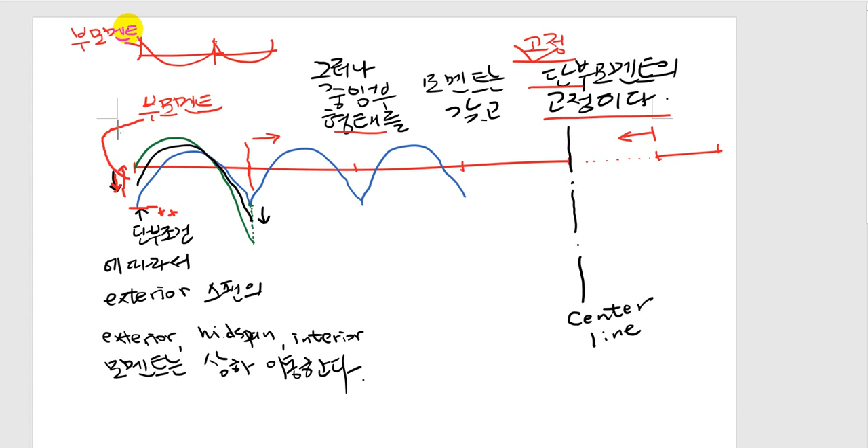근데 또 많은 책들을 보면은 이렇게 그리죠. 이렇게 그리고 여기를 부모멘트 이렇게 읽어요. 뭐 정신만 바짝 차리면 괜찮은데요, 나중에 이제 밴딩 모멘트 다이어그램이 복잡해지면 막 부정 이게 헷갈립니다. 그래서 저는 아예 처음부터 이렇게 방향을 딱 잡아서 그리는 거죠.

그래서 이제 요 사이를 왔다 갔다 하는데 이게 핀이 돼가지고 단순보가 돼가지고 모멘트가 0이 될 때는요, 얘가 올라가서 이렇게 많이 축 좀 빠지는 이런 형태를 갖게 되겠습니다. 그리고 중간쯤 어디면은 이렇게 되겠죠. 그래서 이 단부 조건에 따라서

여기 M0에 대한 퍼센테지가 바뀌겠죠. 여기가 얼마라 그랬죠? 그러니까 여기가 0.65 M0였죠. 여기도 0.65. 다 0.65죠. 여기는 0.35였죠. 기억나시죠? 그리고 이제 이것도 변하겠죠. 그리고 이 안에는 안 변한다는 얘기죠.

그래서 여기를 보시면요, 이제 단부 조건이 완전 고정도 아니고 완전 단순도 아닌 어중간한 고정단을 가졌을 때는요, 0.65에서 이제 위쪽으로 이동을 한다 그랬죠. 그래서 여기 있던 0.65에서 위쪽으로 이동을 하면서 이게 좀 내려가죠. 그래서 여기 조금 격차가 있는 겁니다.

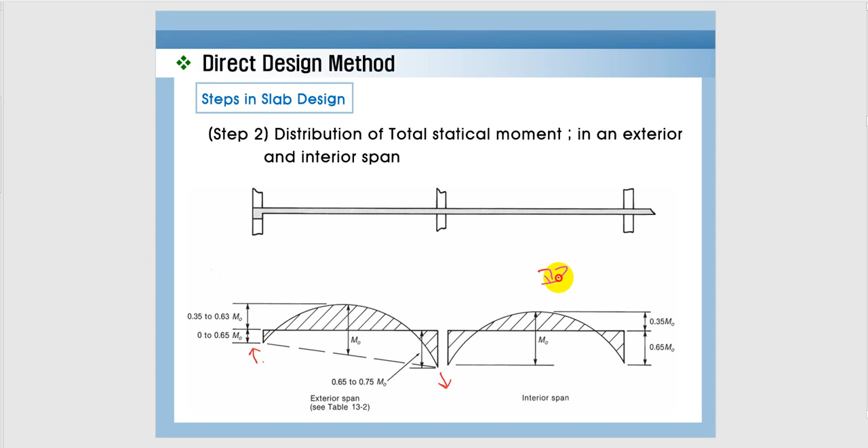그리고 이제 이 내부 쪽은 무조건 다 고정단이다 그랬어요. 이 내부 스팬은요. 여기는 이제 우리가 엑스테리어 스팬이라고 부르고요. 여기는 이제 인테리어 스팬 이렇게 부릅니다. 저희는 항상 이거로 나옵니다.

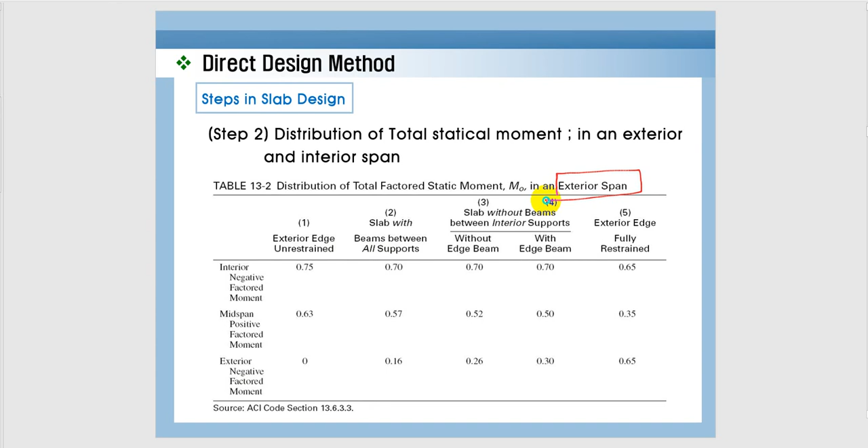자, 그래서 이제 우리가 도표를 보면요. 이제 도표가 좀 이해가 가시죠? 요 도표는 지난 시간에 공부한 거죠. 엑스테리어 스팬에 대해서만 그린 겁니다. 그러면 인테리어 스팬은 왜 안 그려줍니까? 인테리어 스팬은 그릴 필요가 없죠. 왜냐하면은 무조건 0.35하고 0.65니까. 설명드린 대로 엑스테리어 스팬만 그린 거다.

그런 거예요. 그래서 완전 고정일 때는요, fully restrained일 때는 우리가 배운 대로 0.65, 0.35. 이 얘기는 뭐냐면은 아까 보신 대로 완전 고정일 때는 0.65, 0.35, 0.65, 0.35 이 패턴이 반복이 되는 거죠.

그런데 얘가 조금 이제 단순보 쪽으로 흘러가면요. 여기는 작아지고, 여기는 커지고, 여기도 좀 커지고, 그렇게 되겠죠? 그래서 보면요, 완전 이제 단순보로 풀릴 때요.

The exterior edge unrestrained 됐을 때는 여기 0이 되겠죠. 무조건 0이죠. 그 다음에 여기가 이제 0.63으로 올라갔죠. 0.75. 이렇게 되는 거죠. 여기가 0으로 됐죠.

여기 0.65에서 0이 되어버렸죠. 단순보니까 모멘트가 이제 안 걸리니까요. 그다음 0.35짜리가 올라가서 0.63이 됐죠. 올라가겠죠. 이렇게. 그러면 쭉 빠져가지고 여기가 이제 0.75가 되는 겁니다. 이렇게 모멘트 다이어그램이 이렇게 되어 있는 상태에서 이렇게 변하는 거죠.

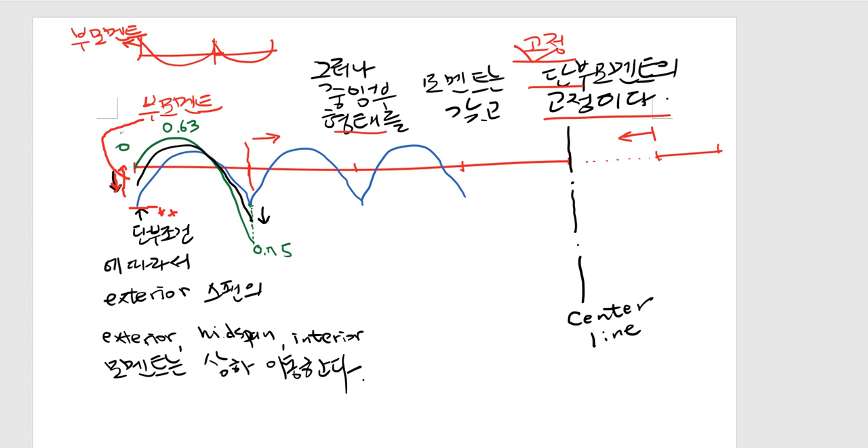자, 그래서 이렇게 이제 각각의 조건들이 이제 3개가 더 붙었어요. 이게 양극단이 되겠죠? 완전 고정, 그 다음에 exterior edge unrestrained, exterior edge fully restrained.

자, 두 번째 경우에는 이제 이 경우죠. Slab with beams between all supports. 그러니까 모든 서포트에는 빔이 있는 그런 슬라브예요. 이런 슬라브가 되겠죠. 모든 슬라브에는 빔이 있는 그런 슬라브가 되는 거죠.

두 번째 경우죠. 그리고 이제 세 번째, 네 번째 경우는 이제 slab without beams between interior supports. 얘는 이제 서포트에는 전체적으로 빔은 없어요. 없지만은 맨 끝단에는 이제 빔이 있을 수 있고 없을 수 있다. 우리가 맨 끝단에 있는 빔을 엣지 빔 이렇게 얘기를 하죠. 그래서 세 번째, 네 번째는 여기죠. 어쨌든 간에 이 서포트에 빔이 하나도 없어요. 그런데 끝단에만 있을 수 있고 없을 수 있고, 엣지 빔. 그래서 이렇게 우리가 5가지가 있죠.

완전히 단순 뭐 빔. 그다음에 여기 하나가 이제 완전 고정이 하나가 있죠. 5번째. 그래서 우리가 양단 고정도의 강한 정도로 볼 때는 이제 완전 고정이 제일 강할 것이고요. 그 다음에 이제 요게 강할 것 같고, 그 다음에 요거, 그 다음에 이제 이거랑 비슷하고, 이렇게 되죠.

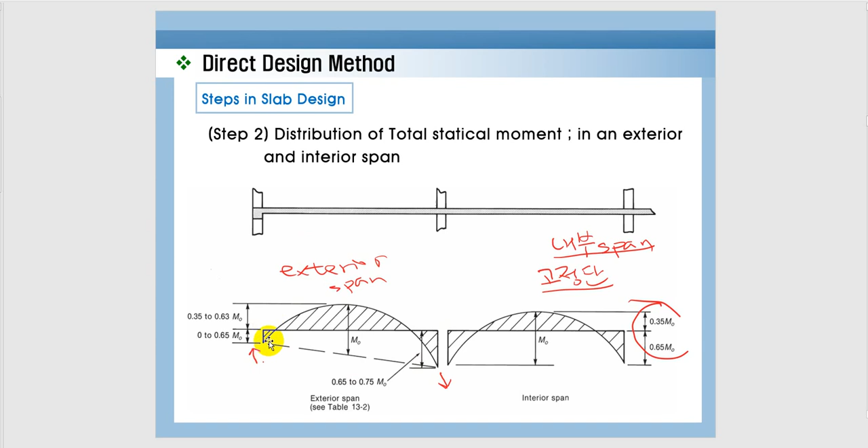이게 익스테리어 스팬을 얘기하는 거예요. 인테리어라는 게 혼동하시면 안 됩니다. 여기 엑스테리어 스팬에서 인테리어 여기를 얘기하는 거예요. 여기가 아니고 엑스테리어 스팬에서 인테리어 여기 얘기하는 거예요. 그래서 엑스테리어 미드 인테리어. 몇 번 말씀드렸어요. 이 표는 단순히 엑스테리어 스팬에 관련된 표고, 인테리어 스팬에 대해서는 표가 없습니다. 왜? 전부 다 이거기 때문에 이런 말씀을 드렸습니다.

그래서 이 경우가 완전 고정될 때가 여기 있었고요, 미드 인테리어, 그다음에 여기 있는 경우가 여기고, 여기 있는 경우가 여기 이렇게 해서 우리가 이 표를 보면 잘 이해가 안 가죠. 이 표를 좀 자세하게 해설을 하면 이렇게 되는 겁니다.

이해가시죠? 그랬을 때 우리가 구조 해석을 거치지 않고 모멘트 다이어그램을 이렇게 그릴 수 있습니다. 여기 보면 인테리어는 무조건 다 고정단 모멘트를 따릅니다. 엑스테리어에만 단부 조건에 따라서 상하를 오르락 내리락 합니다. 오르락 내리락 할 때의 요 계수, exterior, mid, exterior, interior. 지금 많이 반복하고 이제 나중에 문제 풀 때는 반복을 하지 않습니다.

계속 같은 얘기를 반복할 수 없잖아요. 여기 보시면 이런 계수를 가지고 오르락 내리락 하는데, 이쪽으로 갈수록 고정단의 고정도가 강해진다 이렇게 보시면 맞습니다. 굉장히 잘 만들어진 표죠.

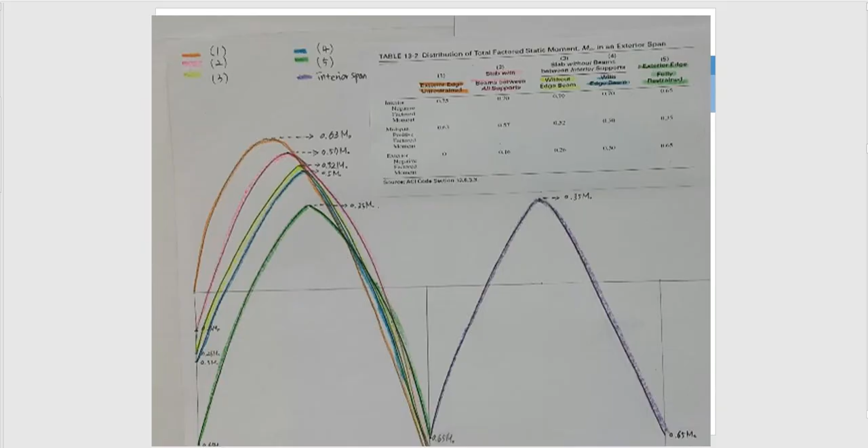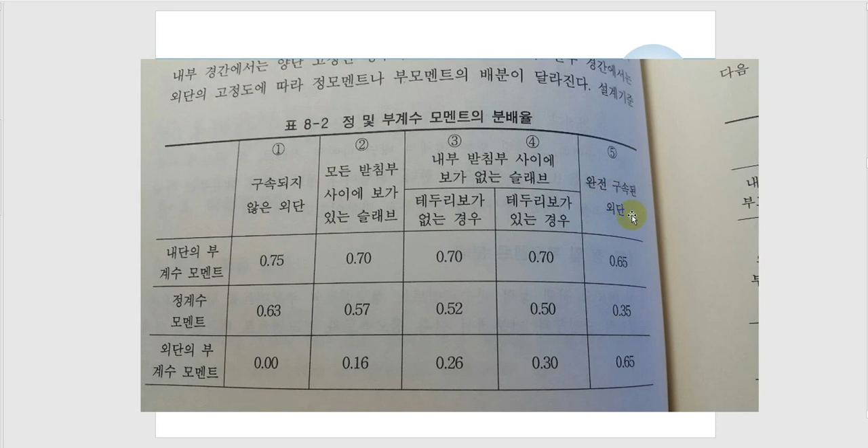완전 구속된 외단. 여기는 전부 다 이 모멘트는 여기에 관련된 해설이죠, 외부. 이걸 잊으면 안 되겠습니다.

그래서 이제 정리를 한번 해볼까요? 여기 보시면 모멘트가 0이죠. 1번 경우에는 얘는 점점 내려가겠죠. 단부가 고정도가 심화될수록 얘는 점점 내려가죠. 여기서는 일로 올라가는 거죠. 그러니까 얘는 내려가고요, 얘도 여기서 높이 올라가서 조금씩 내려가고, 그죠?

다 그런 거죠. 철근을 보면 이 경우에는 우리가 부 모멘트에는 탑바가 지나간다, 이렇게 RC1에서 배웠죠? 부 모멘트라고 하면 상부에 인장이 생기는 거를 얘기하거든요. 부 모멘트의 정의가 뭐죠?

구조 해석에서 부 모멘트는 상부에서 인장이 생긴다 그랬어요. 그래서 상부에다가 철근을 이렇게 보강을 해줘야 되는 거죠. 여기는 부 모멘트가 두 군데가 되겠죠, 같이. 여기는 정 모멘트는 따라서 뭡니까? 하부 인장이죠. 하부 쪽에 해주는 거죠. 부 모멘트 존이, 여기가 정 모멘트 존이죠. 여기가 부 모멘트 존이고, 여기가 정 모멘트 존이에요.

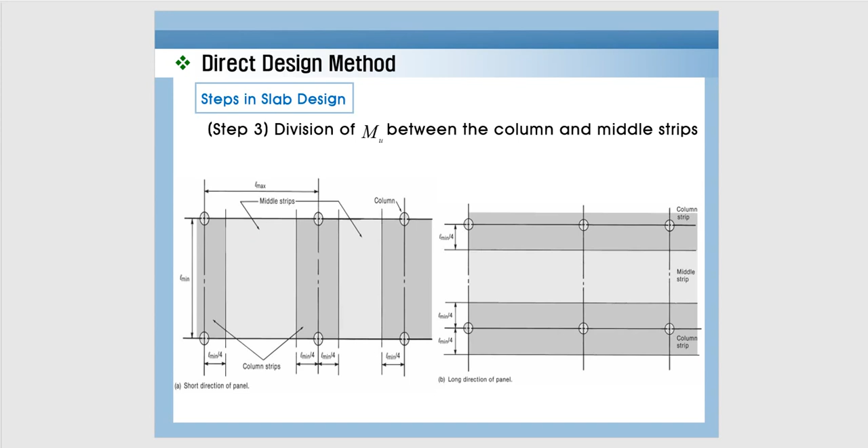We need to separate, or divide, the moment between column and middle strips, because we have column strips and middle strips. The reason we are doing this is because we need to calculate and add more moment to the column strip, since the column strip is attached to columns, so it will take more moment than the middle strip. This is the concept behind dividing the strip into column strip and middle strip. So we have a method for how to divide and assign the bigger moment to the column strip.

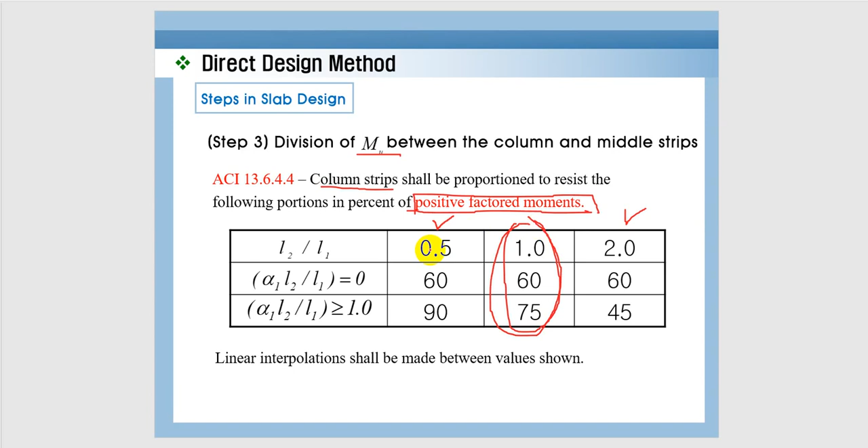So this is a square slab. Aspect ratio changes make the rectangular slabs, square slabs, rectangular slabs, and your column strip will take 60 for all three cases where you don't have any beam underneath the slab, whereas when you have a beam, your column strip will take more or less, same as for the interior negative factor of the moment. So this division represents this part right here, positive moment, positive moment.

So now using two tables, we're ready to divide the moment into the column strip, indicated by red, and the blue representing the mid strip moment for mid span and interior negative. It is pretty simple once you understand the table well, otherwise it could be confusing.

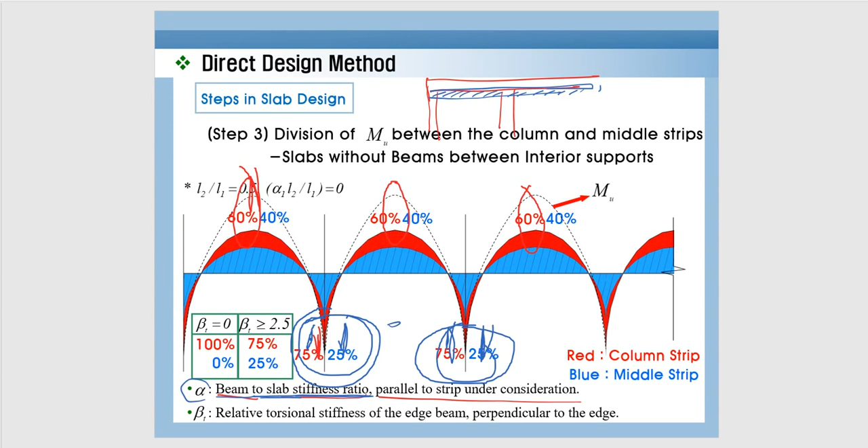So practice yourself sometime. The following example is again from the Professor.

Thank you. So let's calculate a moment.

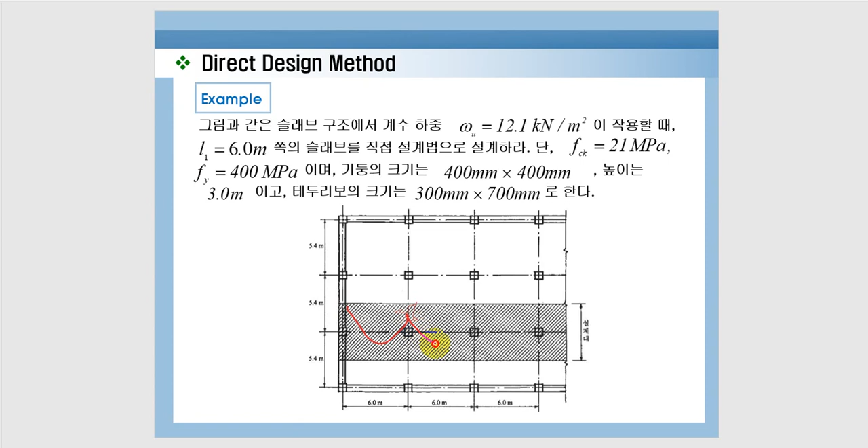We need to calculate moment this way and this way so that we can design. Without moment we cannot design, can we? So we have moment here, some moment this way, and we have moment this way. Understand?

Okay, so these moments are calculated and then divided into column strip and middle strip. This is the first way to design slabs.

First of all, we need to assume a slab thickness. Slab thickness can be assumed using this table when you don't have interior beams. In this example, we don't have any interior beams, only exterior edge beams. Then we can use this table to assume the thickness of the slab. This is a very convenient table.

And when you do this, we need to calculate the span lengths inside of the columns, from here to here. This is what we need. So this is 6 meters, and we have a column size of 400. So the span inside the column will be 5,600 millimeters, which is pretty easy.

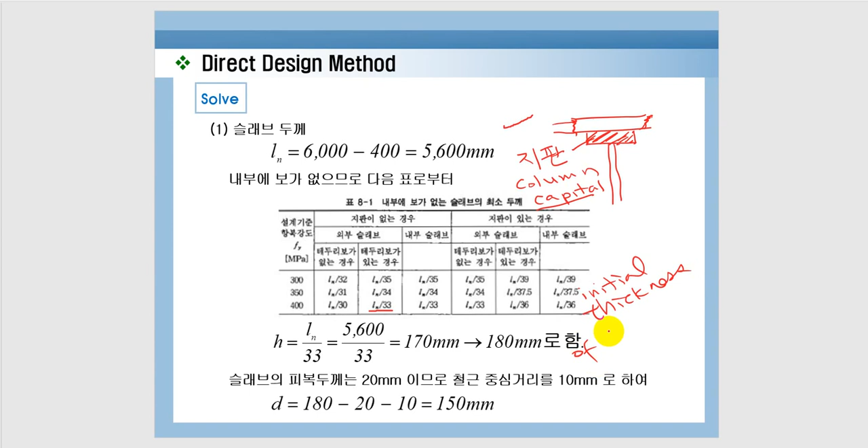So this table is very convenient. We choose Ln over 33, which is 170. We take 180 as the initial thickness of the slab. So we verify this later.

And then we have a cover of 20 millimeters for slabs. The cover is here for the slab, and these are the rebars, and this is the cover, isn't it? So this is what we learned from RC1.

Okay, so this is the effective depth of the slab. This is calculated by subtracting cover and half of diameter, which is the radius of the rebars, from 180, which you assumed as the initial thickness of the slab. So you get 150 millimeters.

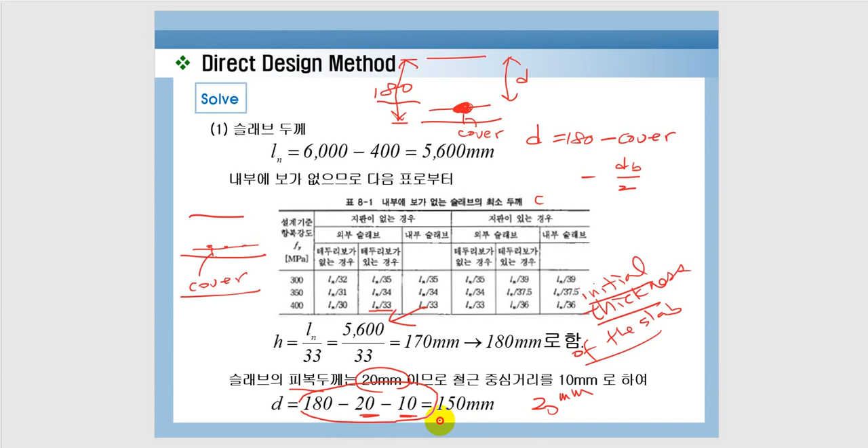And we have now every information to calculate the statical moment. What's this statical moment? As we saw in the previous lecture, it's omega Ln squared times the width of the slab. Ln is the clear length, we calculate 5.6, and 5.4 is the width of the slab from here to here. This is the width L2, and this is Ln.

So we get this formula for calculation of the total statical moment, and 12.1 as a load intensity is given right here. Don't miss these units, kilonewton per area. So we calculate this. This is the total statical moment, everything.

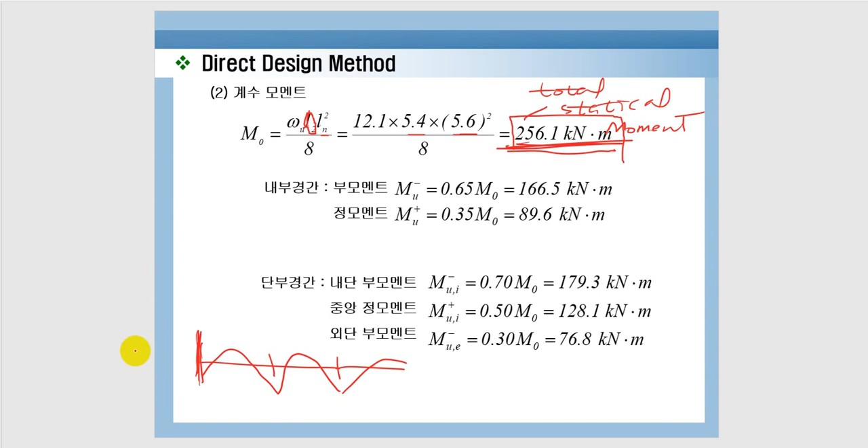So we need to divide this using a moment diagram, also we need to divide this into column strip and middle strip. We have a long way to go. First of all, we want to calculate the bending moment diagram, something like this that we saw in the previous lecture. So then we need to know the boundary conditions, then you can go into the table and pick up the number, as we saw.

Our boundary condition is that we have an edge beam and we don't have any interior beams. So I summarize right there with the edge beam and without interior beams. What's the number that we can pick up from the table? Let me go there. If you see over here, see this one - without any beams, and then we have an edge beam. So we pick up exterior span: exterior 0.3, mid 0.5, and interior 0.7.

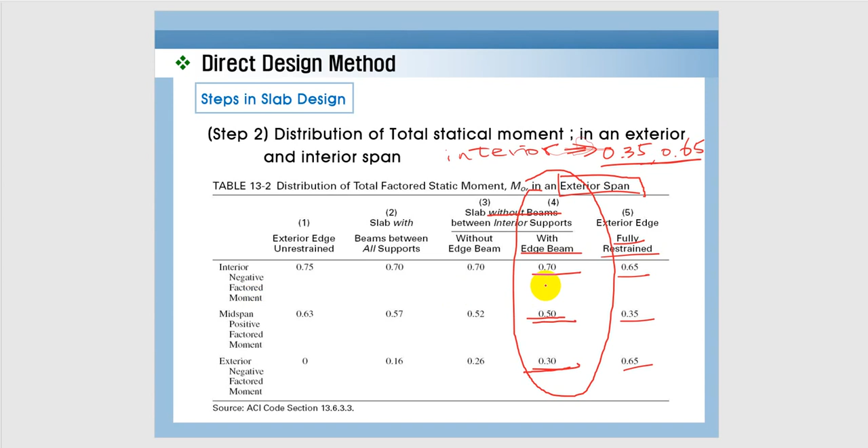So we are having these diagrams. Everybody follow? Now this is very convenient, as I said. So we have an interior span, negative moment here 0.65 and positive moment here 0.35, and this is all repeated. All interior spans have the same coefficients as I said, except the last span. And we have here 65 and 35... 65, and we have a total statical moment.

It's going to be substituted in here, and this is why we call this total. So we have to divide this to calculate the bending moment diagram depending on the boundary conditions. Also the exterior span is exterior mid interior, so this is 0.3, 0.5, 0.7, and we substitute it here.

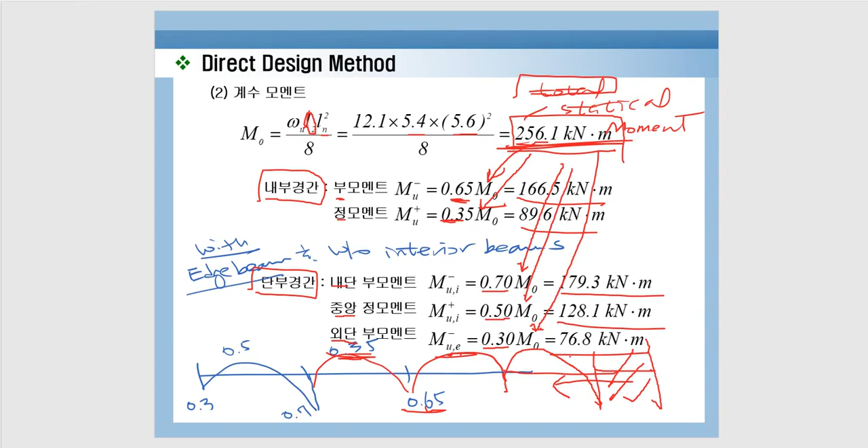Okay, so we got these moments here, so now we can write numbers here. We got numbers here: 0.3, 0.5, 0.7 and 65, all that, right, and we have numbers here. This moment at 0.3 m0 is 76.8, at 0.5 m0 is 128.1, and at 0.7 m0 is 179.3. And here the 65 coefficient will give you 166.5, and the 35 coefficient will give you 89.6, because your statical moment is this.

Now you're not done yet. We have to separate this moment into, yes, column strip and middle strip. That's the last task before we design.

We need to use this table to calculate the moment taken by the column strip, and we have a square slab. Why square slab? We see this here, 6.0 this way and 5.4 this way. So we assume that this is a square panel, which is an aspect ratio of 1, so we can just use this.

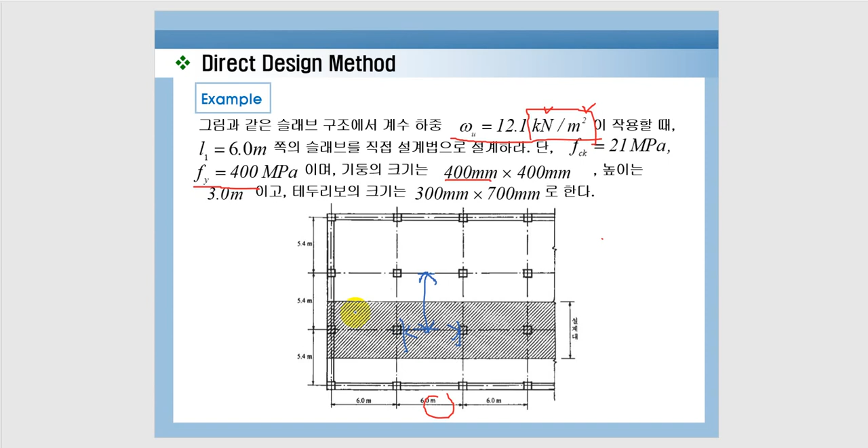This is the case where we're going to pick the number for the column strip that takes from the total statical moment, and that's how many percent is that? This is the one - how many percent is that for negative? Interior negative, you'll take 75 by column strip and 25 by middle strip.

Here we have a positive factored moment, with 60% taken by the column strip and 40% by the middle strip. That's the positive factored moment when you have a square slab with aspect ratio 1.

This diagram summarizes what you've seen so far. This is the mid strip, and we don't have any alpha because alpha is 0, since we don't have interior beams. That makes the calculation much easier. But if you have an alpha, you need to consider this table, which is not a big deal anyway.

So 60%, 40% for the positive moment, and 75%, 75%, 25% for the negative interior moment. This is the moment portion taken by the column strip, and this is the portion taken by the middle strip. You're multiplying the statical moment based on the bending moment diagram you just obtained.

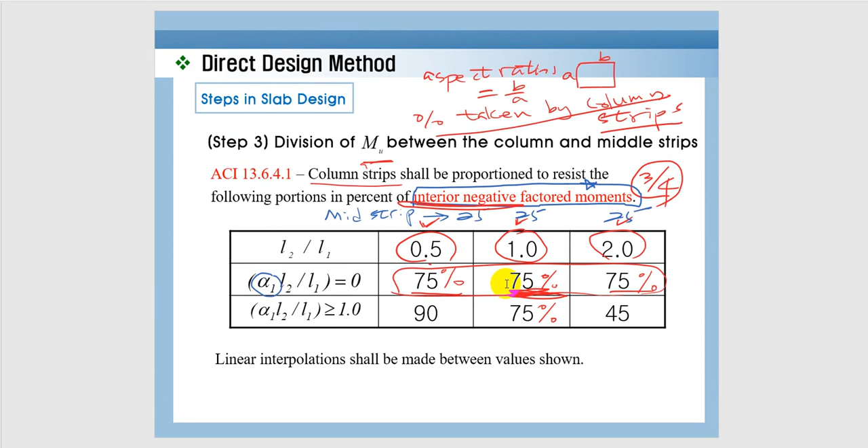Let's go back to the summary table. This is your bending moment diagram, and you have to divide that by 75 to 25. Let me double check... 75, 25, right? Okay, and then positive 60, 40. Do you feel comfortable? This is 75, 25, and this one—I'm sorry, we don't get that yet.

Let's talk about that later, that's a different story. So we just talked about the interior here and the positive here, all the same. This is the total statical moment based on the bending moment diagram, and this is 75, 25. I'm sorry, 60, 40. This is also 60, 40 based on this moment, and 60, 40 based on this moment.

And then here, 75, 25 based on this moment. 75%, 25%—of course 75% by the column strip, 25% by the middle strip for this moment.

So we got all the moments for designing the slab except the exterior span of the exterior end. Why is this not done yet? Why can't we apply this formula here? Why not?

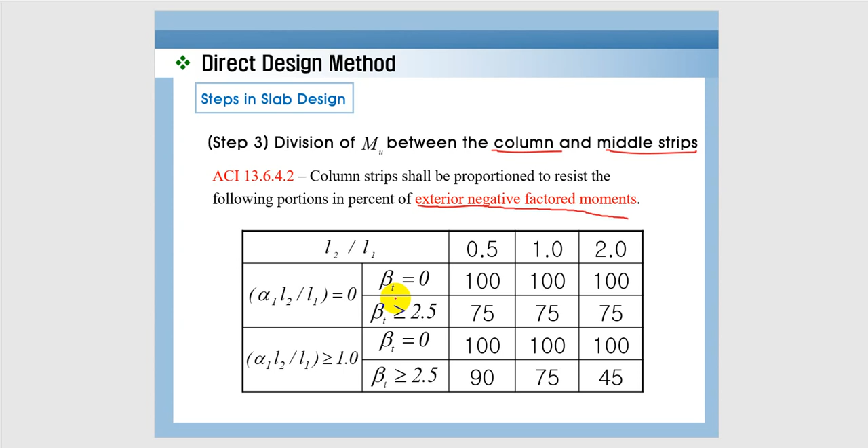Exterior negative factored moment, when you have an edge beam. The edge beam allows you to use different percentages, so that if you have a square column with different aspect ratio, when beta equals 0, you can just take everything by the column strip. This means that if you don't have an edge beam, the entire edge moment is taken by the column strip, so you don't need to design the middle strip.

Do you understand this number? Do you understand this number? When you have a beta greater than 2.5, you have 75 as before. In between, between 0 and 2.5, you interpolate.

This is for when you don't have any interior beams. In this particular example, we don't have any interior beams, so alpha 1 equals 0, and you can follow this formula. But we need to calculate beta. I didn't explain how to calculate beta yet, but I'll explain now. When you have an interior beam where alpha 1 exists, you can go and calculate beta again, following a ratio similar to this one.

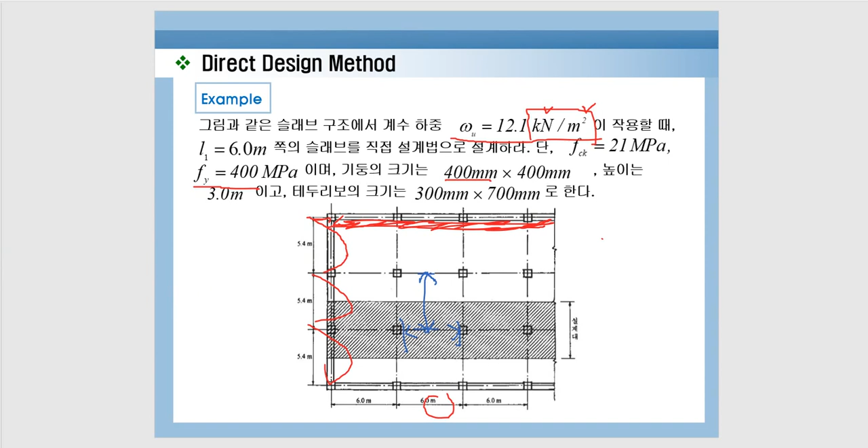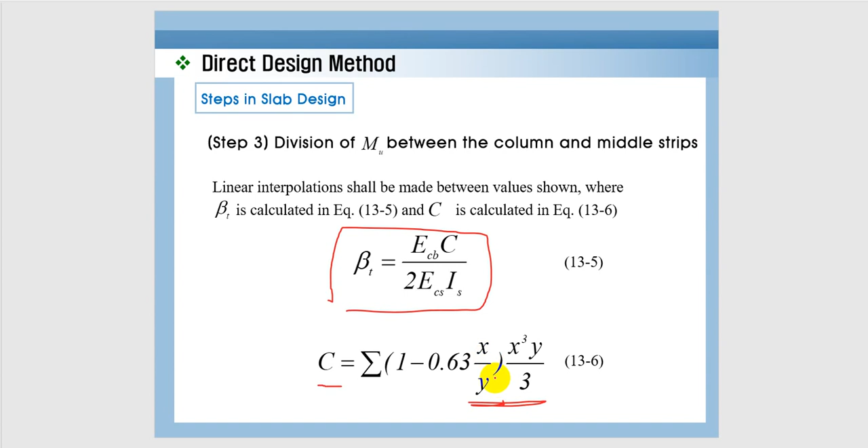So how do we calculate beta? Beta is calculated based on this formula, which is based on the torsional rigidity that we learned from mechanics of materials, where we calculate C based on dimensions X and Y, which I'm going to show you now. This is how you calculate C and beta.

When you have an edge beam here, first we need to calculate the torsional rigidity of this edge. This edge is perpendicular to the strip we design—we design the strip this way, the bending moment this way, and the edge beam goes this way. So this is perpendicular to the strip under consideration.

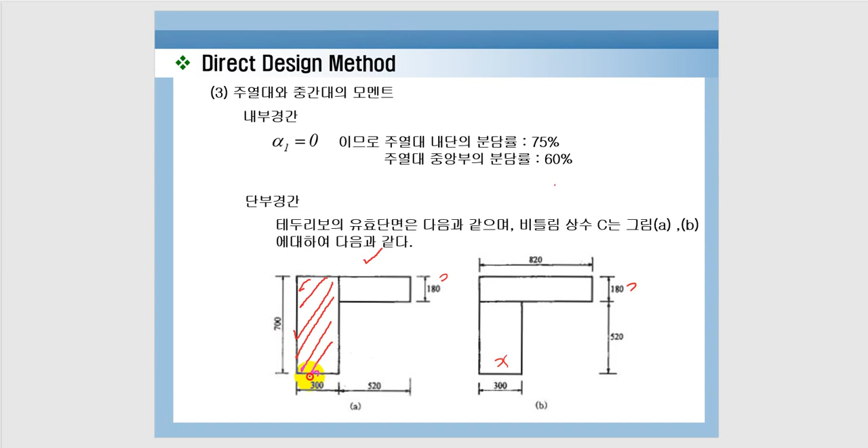We're going to skip the derivation of the torsional rigidity, but I'll explain directly how to calculate the torsional stiffness due to the edge beam. First, you need to divide the edge beam and slab in certain ways—there are two cases where you can model your edge beams. First, you have an edge beam including your slab portions. Second, your edge beam does not include the slab portion. So you have two types of edge beam configurations.

Okay, configurations. We assign the long dimension as Y. This is Y, and this is Y. So of course this is X, and this is X. And here, in this case, this is the long side for this rectangular. So this is Y, and this is X, the long side of this rectangular. So this is Y, and this is X.

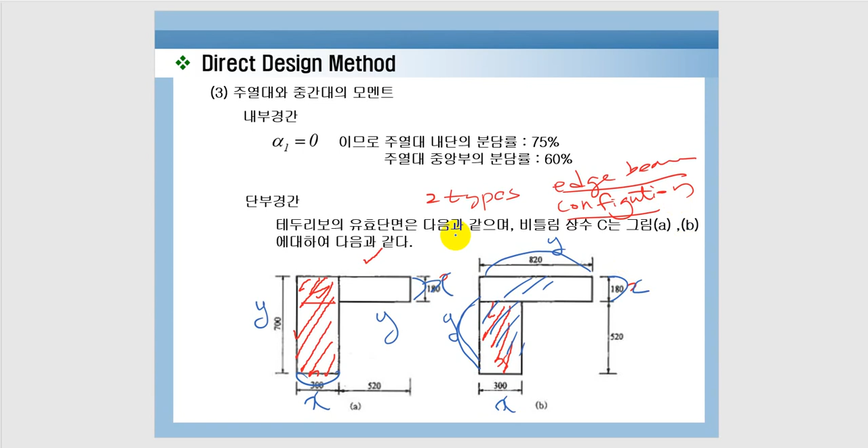Now we use the formula given before here, this formula, and we substitute X and Y accordingly. I said the long dimension is Y, short dimension is X, and long dimension is Y, short dimension is X.

We have the first configuration with this: 5,389 times 10 to the 6 millimeter to the fourth. We have a similar calculation here.

Between the two, we choose the bigger one, this one. So we choose this, and I, which is the moment of inertia, is easy: BH cube over 12. This is the moment of inertia we learned from previous classes. Now we're ready to go and plug all these numbers in here.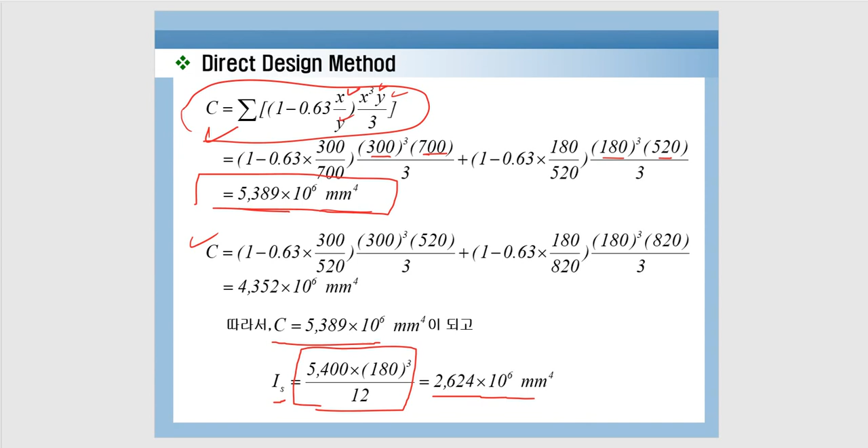We have a C, we have Is, and we get this number: 1.03. As long as we have this condition where we don't have any interior beams, this goes to 0, and we get 1.03.

So we have to go and get the number from this table. We're going to select this part, but we have a 1.03 beta, so we need to interpolate these numbers somewhere in between here. This is interpolation.

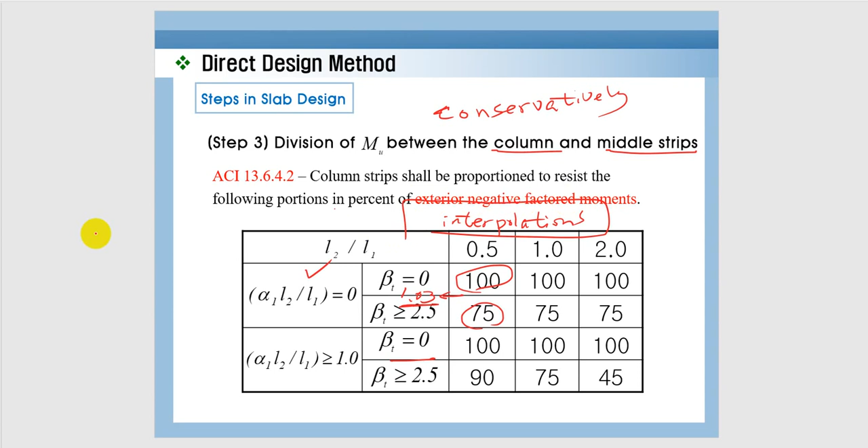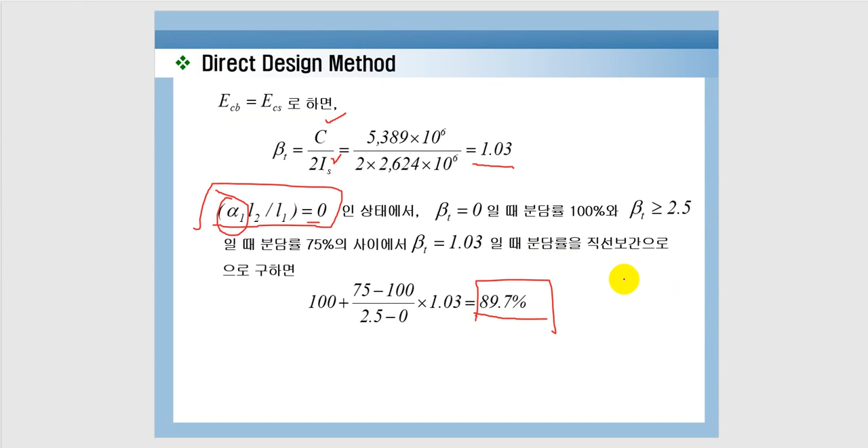Okay, this is not that difficult. So we get a number which is 89.7 by interpolation, so that the column strip in this particular area will take 89.7% of the total statical moment.

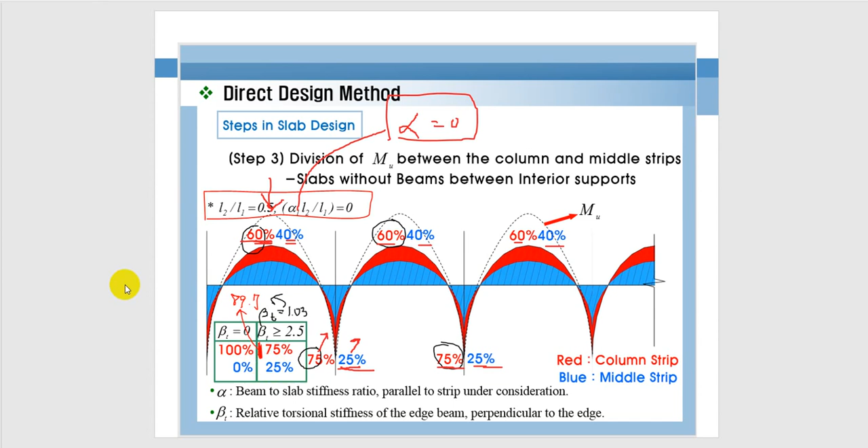So now do you follow? So this is the total statical moment, and this total statical moment is divided into the column strip and middle strip depending on the ratio, which is what? I forgot—89.7. 89.7, almost 90% and 10%, right? So yeah, this is 10% of this.

Okay, so we have now separated all the statical moment based on the bending moment diagram into the column strip and middle strip. As you see, the column strip moments are greater than the middle strip. Why? Because column strips are attached to the column directly, so they naturally take more moment, which means we have to design the column strip more strongly than the middle strip for safe slabs.

Okay, this is very important, and this is summarized. So now we will make a table that represents this. We can just use this for design. For example, you can design rebars for this moment for the column strip at the exterior.

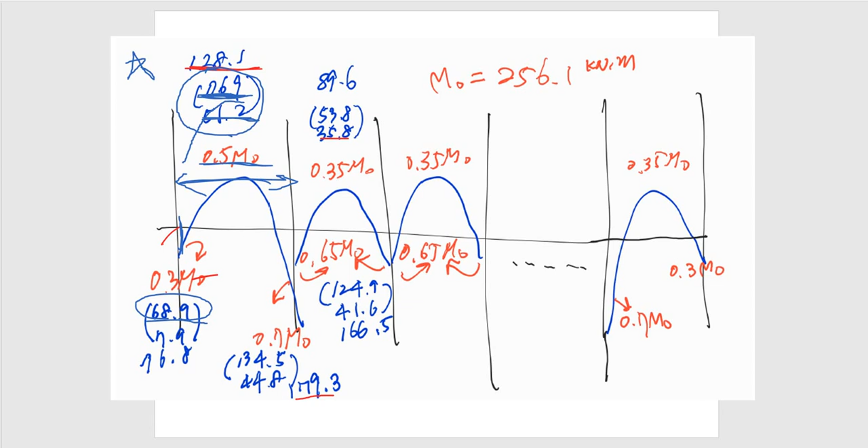All right, and finally we got this, and we will try to wrap up this example in the next lecture.

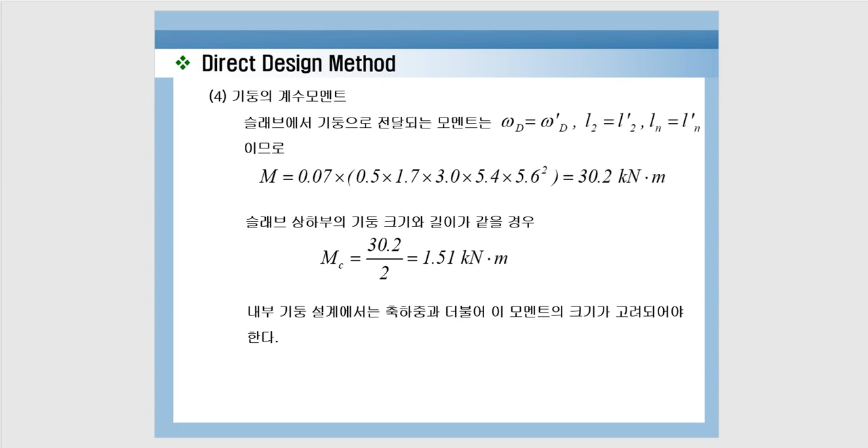So I tried to slow down this lecture as much as possible for you to understand and follow me. But even though you don't, some of you I'm sure don't, you can repeat this video as many times as you want and make a good note. This concept is very important. You just study the concept of how to design two-way slabs today. If you understand the concept today, then the rest of the lectures on designing two-way slabs are very similar.

Very similar—you will enjoy the rest of the slab design, even if a little complicated, because I want to show you some real slab design examples, and I made a significant effort on making notes. But before we get into that topic, you need to review today's lecture thoroughly. Thank you.